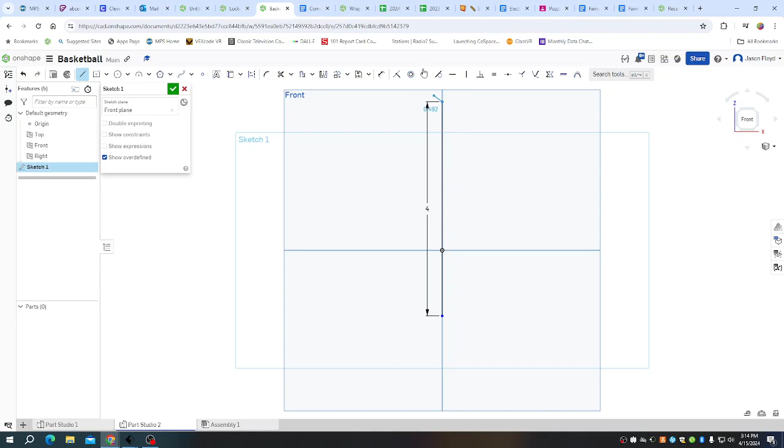To the top of this, to the 0 point on that axis, I'm going to dimension that 2 inches so it's centered. I'm going to grab my 3-point arc tool and make that a 2 inch. Then I'm going to come to my revolve tool, choose that center axis, and there is the basis for my basketball.

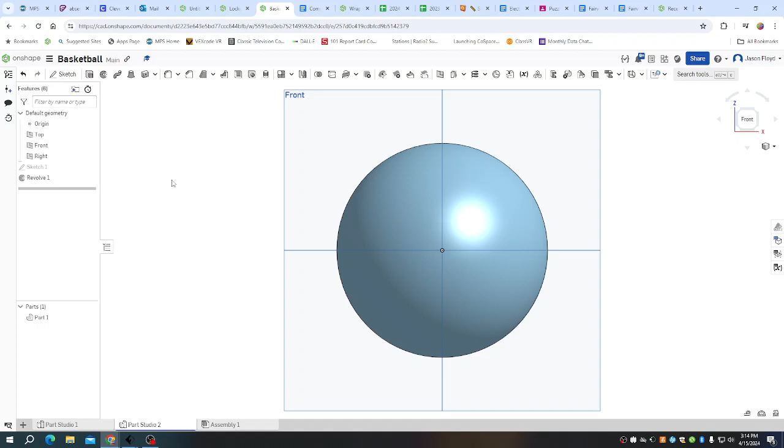I'm going to hide this so I can make the lines into it now. So I'm going to grab my sketch, go to my circle, and make that same 4 inch from that center point now.

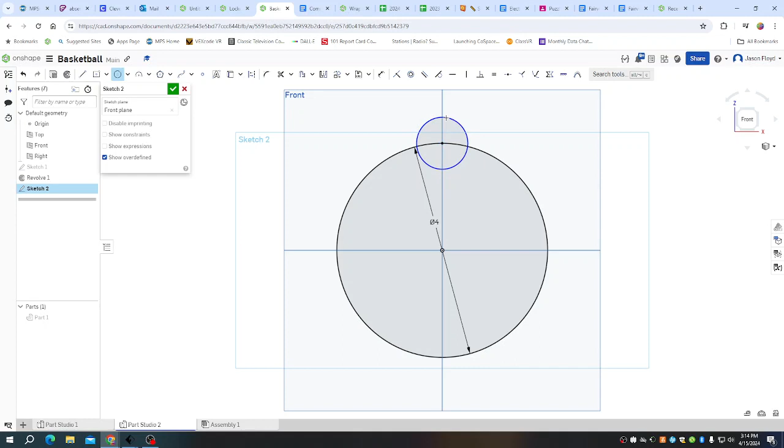Now what I'm going to do is grab that center point circle yet again, and I'm going to go from the top here, and go 2.25, which is going to be the start of my lines. I'm going to grab another one, and I'm going to offset this 2.45.

The great part now is I can use my mirror tool, so I'm going to mirror over that center axis. I'm going to grab those lines right there, and I've mirrored it.

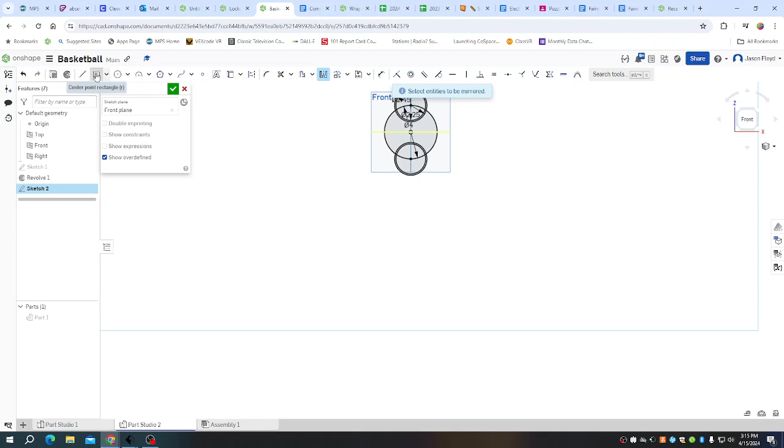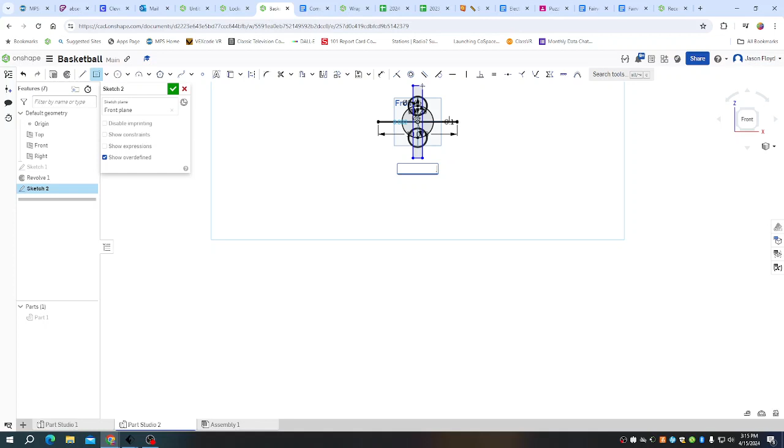Now for the center lines, I'm going to grab my center point rectangle tool. It doesn't matter the length on this one, so 10 is just fine. I'm going to go to 0.1, which matches everything else I've done. I'm going to do the same thing going vertically - again it doesn't matter the length on this one. We're going to go to that same 0.1, and I can enter.

So what you can see now is I have my setup for my lines. What I'm going to do now is grab my trim tool, and I can just hold down that trim tool and cut off all my excess lines that we're seeing here. I'm going to cut off what's in between here, so I'm just left with this shape now.

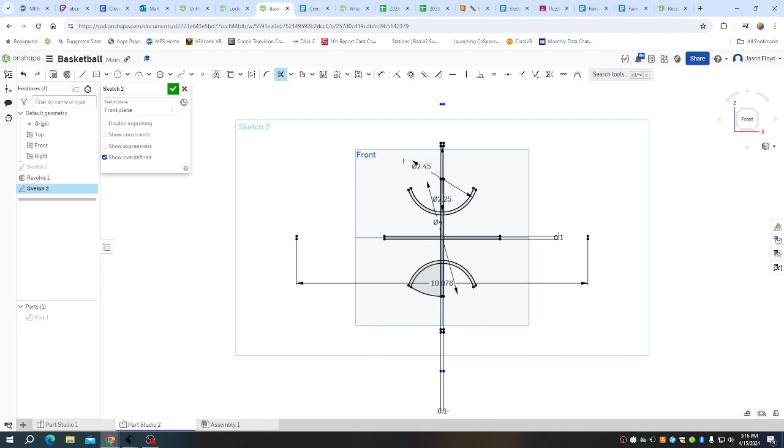You can spend the time, for the sake of the video I'm not, to clean up these other ones as well, all these little points floating around here, and getting rid of those lines. It's not going to affect what I need to do for this now.

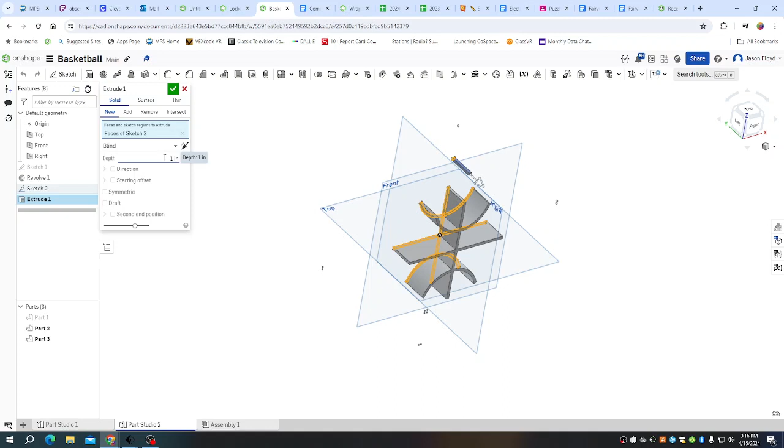So now what I can do is I can come over here to my extrude button. I'm going to do this as a removal. I'm going to go through all, do it symmetrically, and merge it. So what you can see that does is it gives me my basketball.

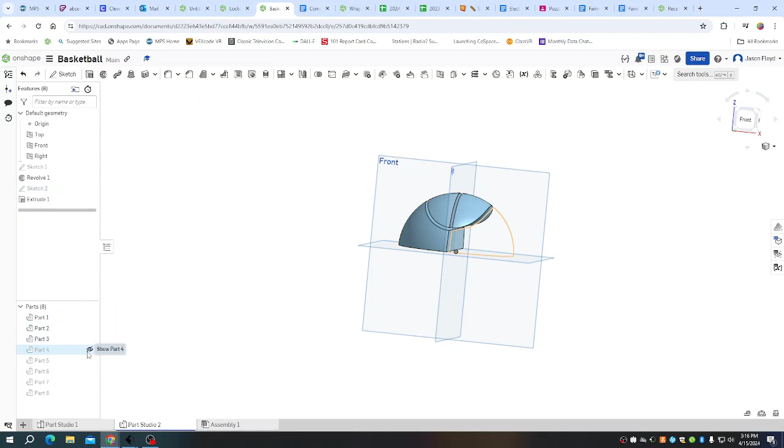Now, as I show my parts down here, the reason they disappeared is I didn't have them showing. I'm going to come to that same front plane right now, place my sketch, and do that same exact process as I did earlier. So I can do that 3.8 inch line because I want a little bit less.

I'm going to come to the top here to the center point and dimension that - I'm going to go 1.9, which puts it in its center. I'm going to grab my 3-point arc tool, and again make that 3.8 inch. And again, I have a geometry area there which I didn't account for, so I can just simply delete off that geometry area.

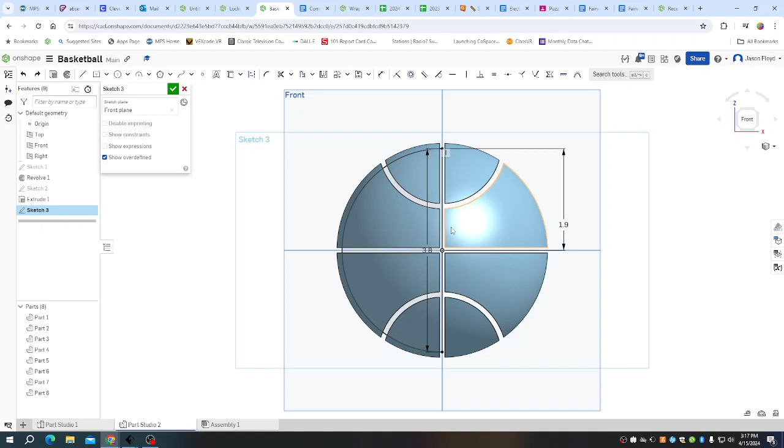I'm going to have to go back, so I want that 3.8. I'm going to come to my revolve tool, choose that center axis, and I want to add it to my existing sets of parts and merging all. So what you can see is I have a nice basketball there.

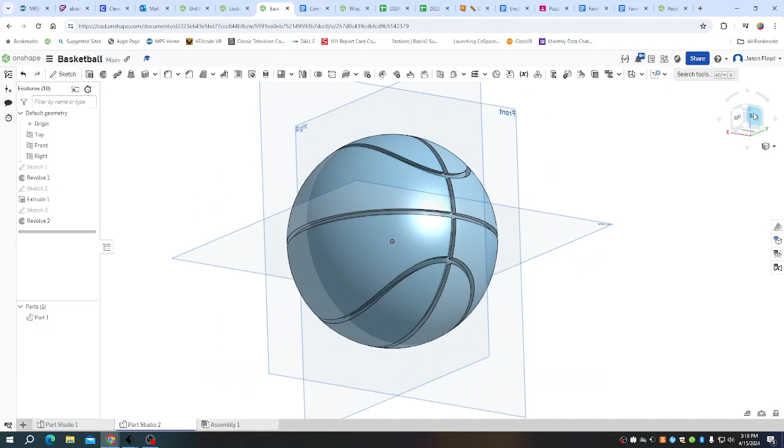So if you want to know how to engrave it and give it, I'm going to go to my right side view. I'm going to grab a plane, go to right here, and offset my plane half the distance on this, which is 2 inches. So as you can see, I brought that plane all the way out.

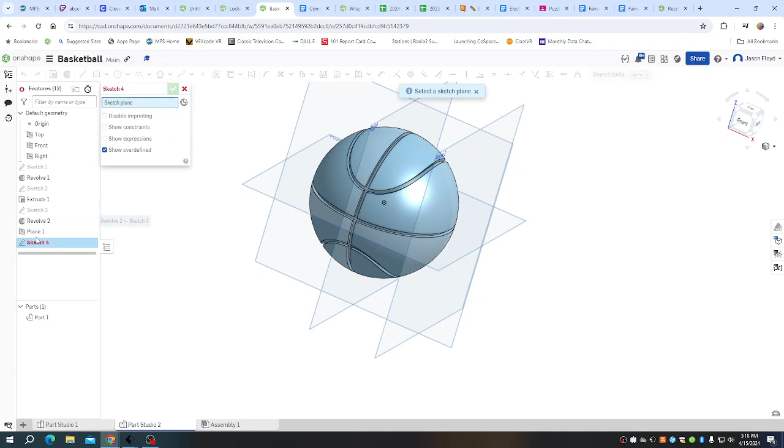I'm going to place a sketch on that plane right here, go back to that right side view. I'm going to type in the name of my school here, which is Fairview.

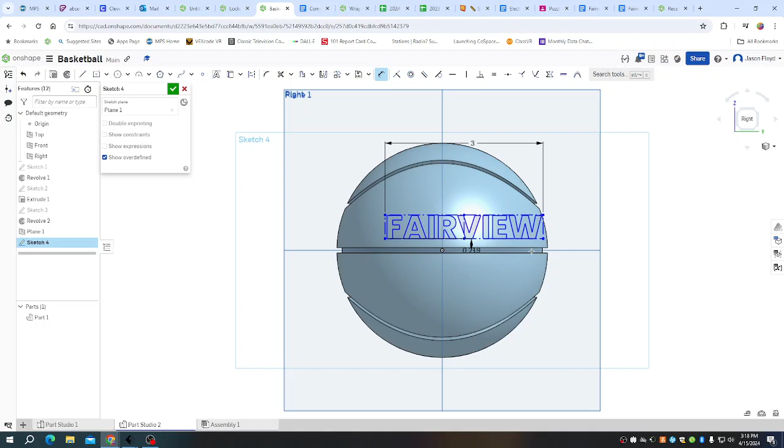Now, for the size of my basketball, let's say I'm going to dimension this to 3 inches. Let's do a half inch up from that center point to make it nice and centered. And from the end of this to the middle point, because they were 3 inches, I'm going to center that at 1.5.

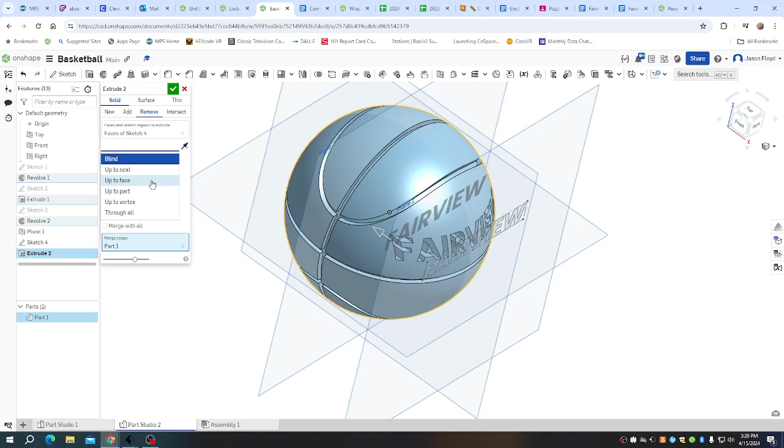So the next thing that I'm going to do is I want to extrude this. I'm going to do it as a removal. Now, to make this work a little bit nicer, what I'm going to do is come to my settings here, and I'm going to change this to up to the face of my part.

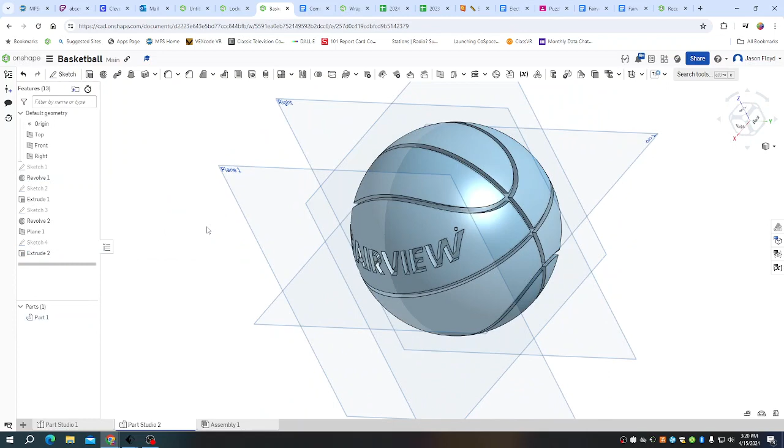I'm going to offset my distance for the engraving - we'll say 0.1 for this circumstance. I'm going to have to flip my direction with this, and then merge with all. I'm going to select this portion of the basketball, and I can see that nice engraved text 0.1 inches into the basketball that's uniform, instead of just extruding a set distance where different parts have different depths to them.